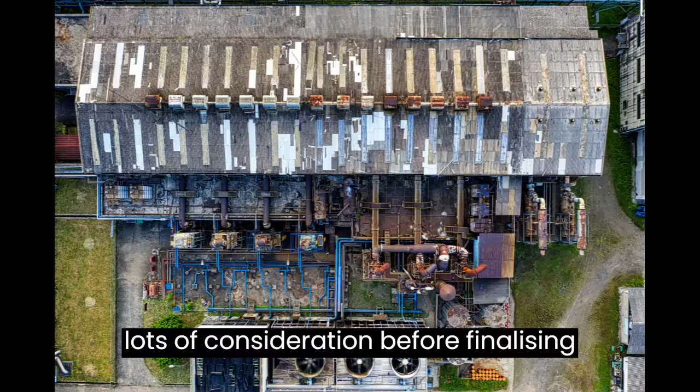Welding is a crucial part that requires lots of consideration before finalizing it, for instance service conditions, material requirements, etc.

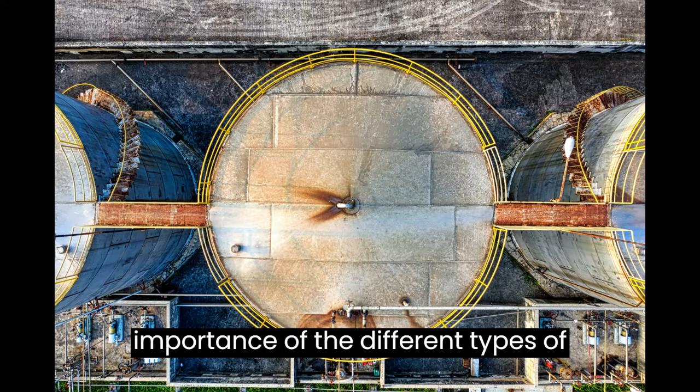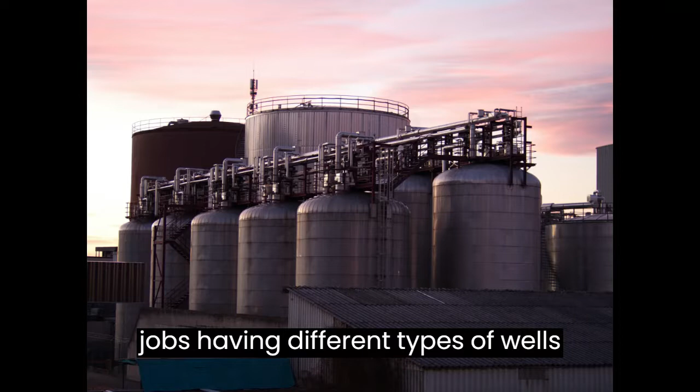To do our job successfully, we have to understand the importance of the different types of joints and their practical application. The operations of welding are endless and increasing day by day, with different jobs having different types of weld joints. In short, we could classify welding joints into 5 major types, which are made to stand up to the requirements of construction operations. Keep watching to learn about each of the different weld joint types and how they can apply to a career in the construction field.

The 5 major types of weld joints are: 1. Butt joint welding, 2. T-joint welding, 3. Corner joint welding, 4. Lap joint welding, 5. Edge joint welding.

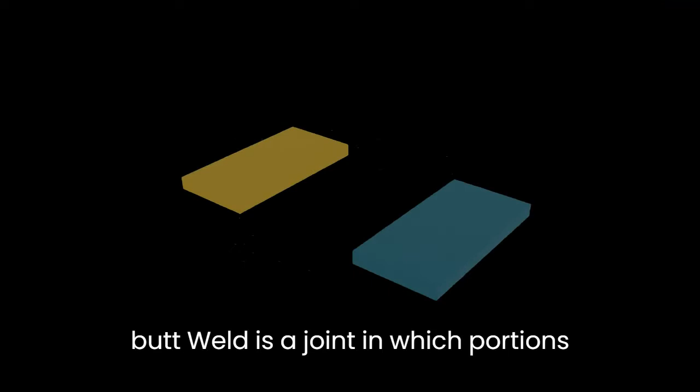1. Butt joint. A butt joint, or butt weld, is a joint in which portions of steel are positioned together within the same plane, and the side of each steel is joined through welding. A butt weld is the most common type of joint. This is used in the fabrication of structures and piping systems.

It's pretty easy to prepare, and there are numerous special variations that may be applied to achieve the preferred result. Butt welds are made in many ways, and each serves a special purpose. Varying elements include the shape of the groove, layering, and width of the gap. Listed below are a few common examples of butt weld joints: square butt joint, single bevel butt joint, double bevel butt joint, single J butt joint, etc.

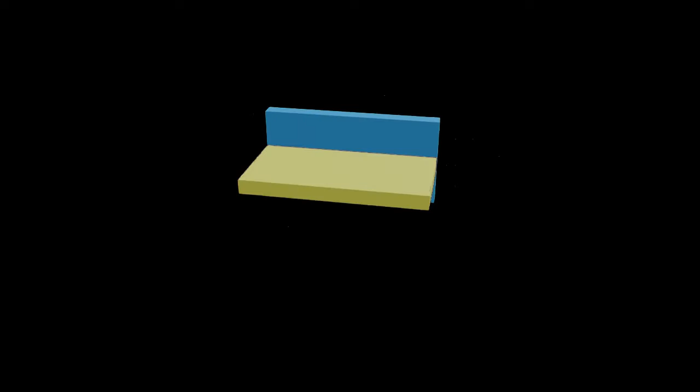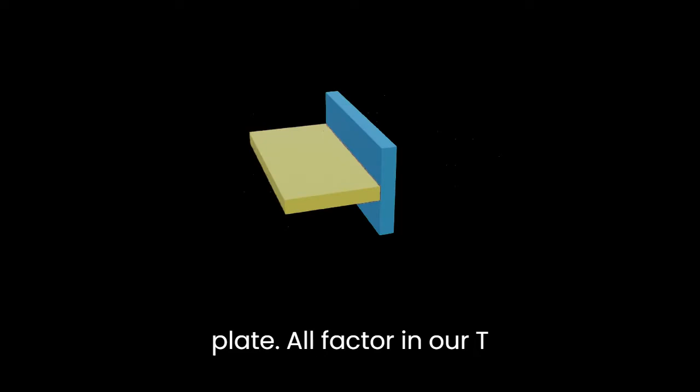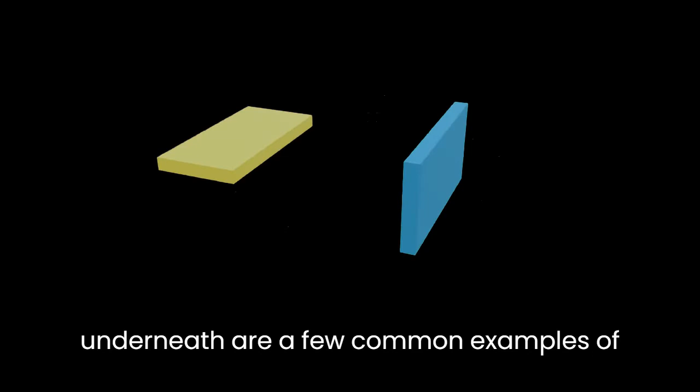2. T-joint. T-welding joints are formed when portions intersect at a 90 degree angle. This results in the edges coming together in the middle of a plate or point in a T-shape. T-joints are considered to be a form of fillet weld, and they can also be formed when a tube or pipe is welded onto a base plate. Listed below are a few common examples of T-joints: plug weld joint, slot weld joint, fillet weld, etc.

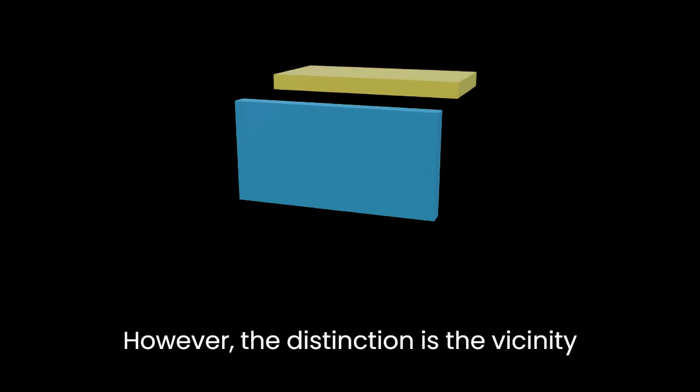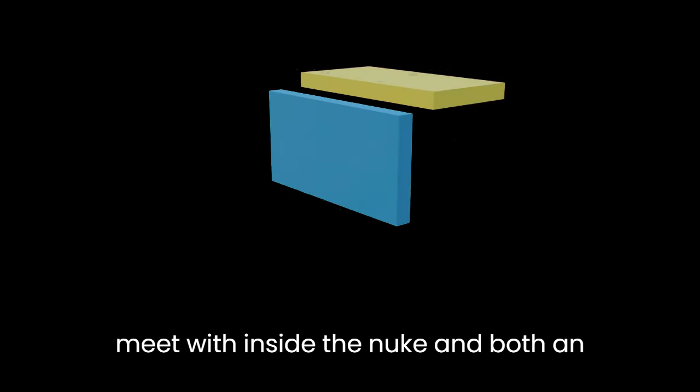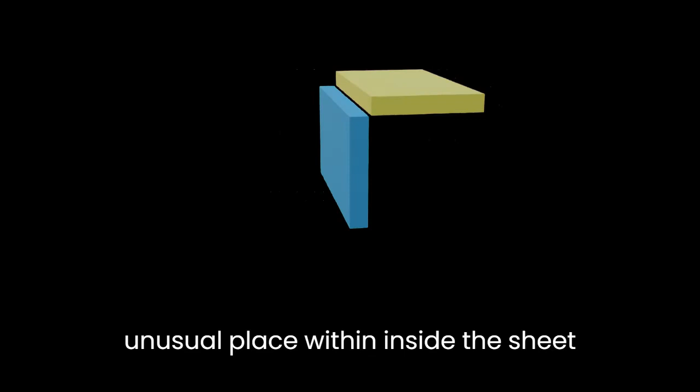3. Corner joint. Corner joints are very much similar to T-joints; however, the distinction is the location of where the metal is positioned. In the T-joint, it's located within the middle, while corner joints meet at the corner in either an open or closed manner, forming an L shape. These types of joints are among the most common in the sheet metal industry, including in the production of frames, containers, and other applications.

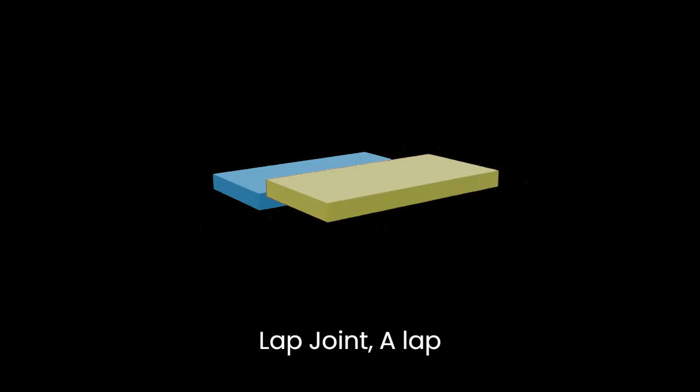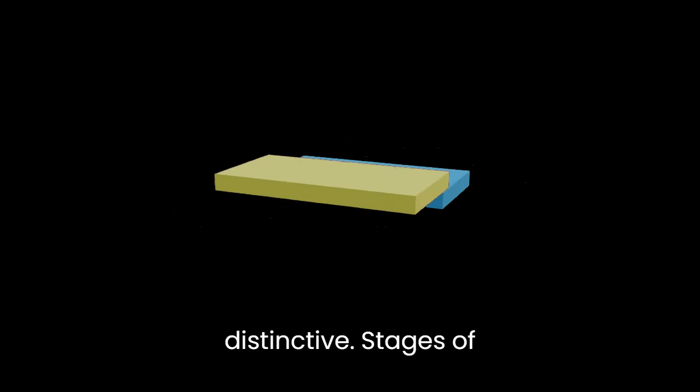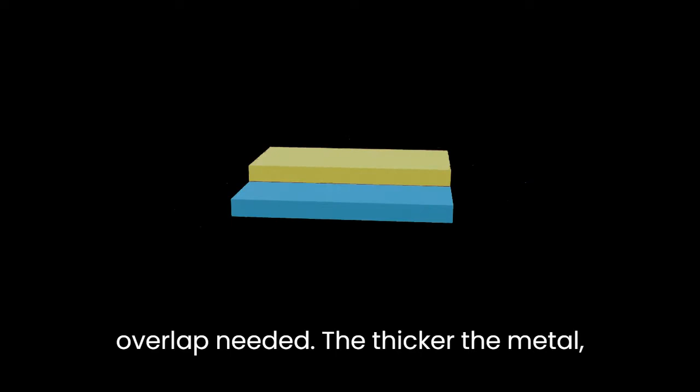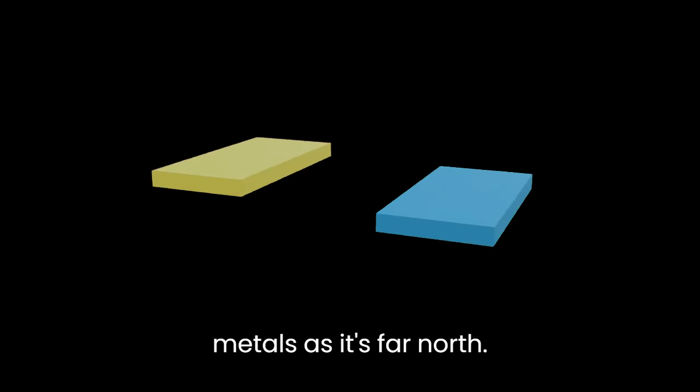4. Lap joint. A lap joint is one of the 5 distinct forms of welding joints. It is most commonly used when joining different metals that have different levels of thickness. The lap displays the overlapping pattern formed when the two metals are joined together. The thickness of the two metals determines the amount of overlap needed; the thicker the metal, the more overlap required. A lap weld may be made on one or both sides, depending on how strong you want the weld to be. You will often find this kind of welding on sheet metals, as it's rarely used on thicker materials.

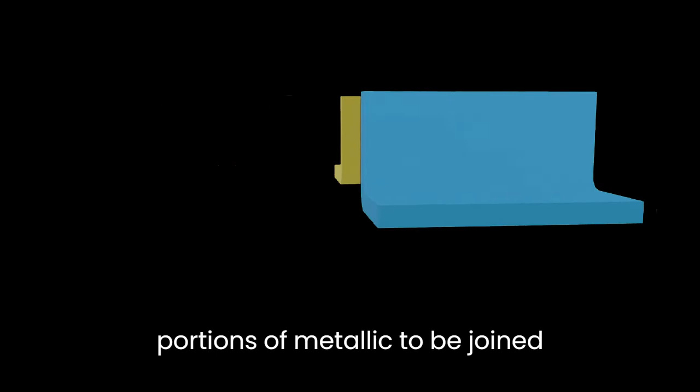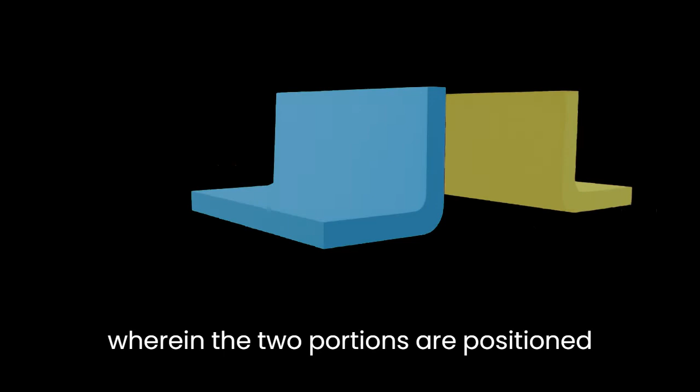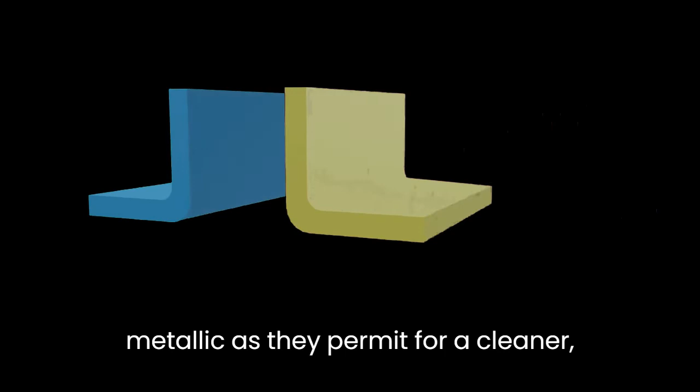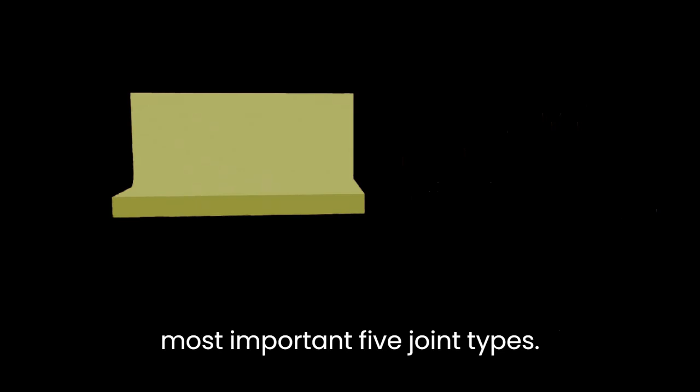5. Edge joint. An edge joint is a kind of welding joint where the two pieces of metal to be joined are positioned side by side and welded along their edges. This is in contrast to butt joints, where the two pieces are positioned face to face and welded along their faces. Edge joints are often used when welding sheet metal, as they allow for a cleaner, more aesthetically pleasing weld than a butt joint. Edge joint is one of the simplest weld joints out of the 5 main joint types. Generally, edge joints are welded only on one side, and consequently are not as strong as butt welds and groove welds.